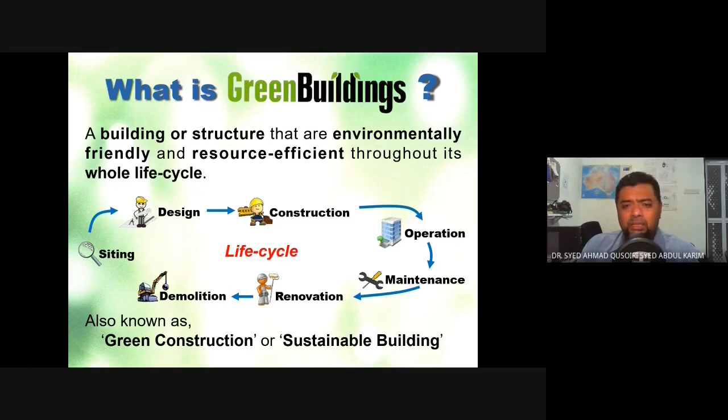The objective of green buildings is reducing the total effect of the built environment on human health and natural environment. As we all know, any developed areas, especially towns, cities, mega cities, consume a lot of resources from the environment, especially in terms of energy, materials, water, things like that. Compared to the suburbs, the city would require a tremendous amount of these resources due to the activities being done in the city area and the number of population in those areas.

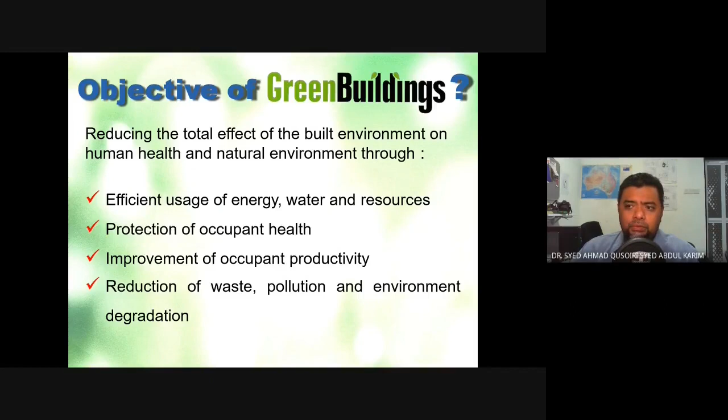So to ensure that these built areas try to sustain themselves as much as possible, it needs to be run in a manner that considers sustainability. One way of doing that is making the building more sustainable by the use of green buildings. Green buildings are able to efficiently use the resources - energy, water, and other resources. They can also protect the occupant's health while using that building, improve the occupant's productivity due to the special characteristics of the building, and also reduce the waste, pollution, and environment degradation due to the activities being done inside those buildings.

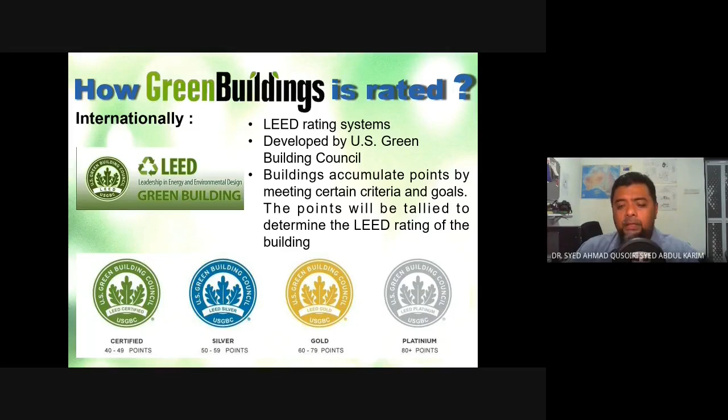So how are these green buildings being rated? In the US, they use LEED, the Leadership in Energy and Environmental Design. This is a rating developed by the US Green Building Council, used in America. Buildings accumulate points by meeting certain criteria and goals. The points will be tallied to determine the LEED rating of the building. Depending on the score or points that you get, you will receive either a full certification, or silver, gold, or platinum certification.

Criteria and goals of the LEED rating system - there are certain requirements to achieve this certification. Projects must earn points in these categories. Innovation - introduction of novel features and procedures of the building, whether during the design, the construction, and so on.

Indoor environmental quality - the use of natural light and efficient air conditioning. The building needs to use as much natural resources as possible to avoid using too much energy in providing artificial indoor environment. If the building is able to take advantage of natural lighting to lighten up the interior rooms, that will be extra points. Modern buildings these days don't rely as much on natural ventilation as in the old days, but even when using mechanical ventilation, they must use a system that is as efficient as possible.

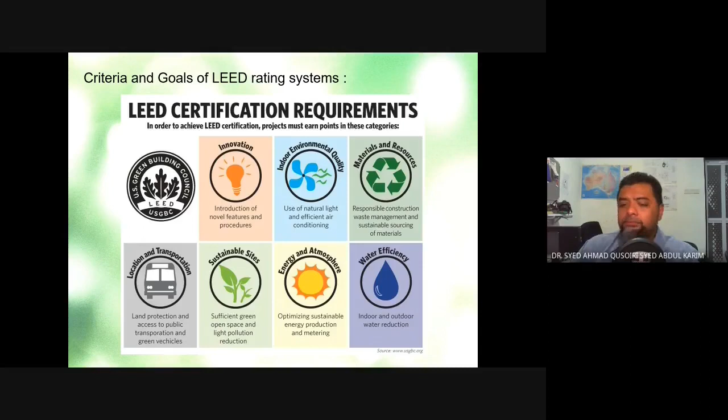In Malaysia, we also have our own rating system. We don't adopt the American type; we have our own, known as the GBI index, Green Building Index, GBI rating system. This is developed by Pertubuhan Akitek Malaysia (PAM) together with the Association of Consulting Engineers Malaysia. It is a comprehensive rating system for evaluating the environmental design and performance of a building, especially in terms of being sustainable, with points ranging from lowest to highest.

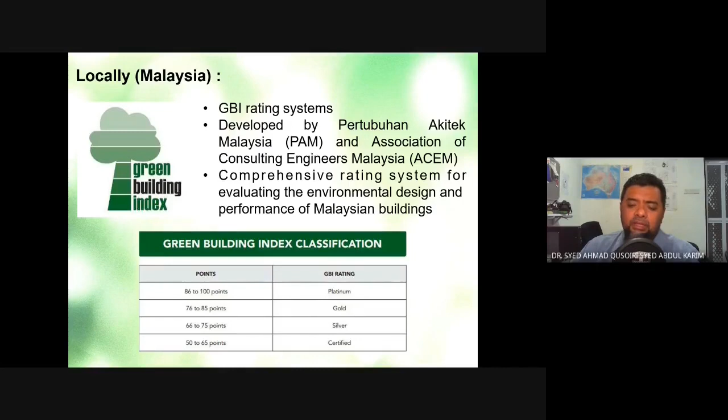The lowest rating is certified, meaning they have the basic certification of GBI. 66 to 75 points gets you the silver rating, higher is the gold rating, and the highest is the platinum rating.

Next is the criteria and goals of the GBI rating system. The building will be awarded based on 6 key criteria.

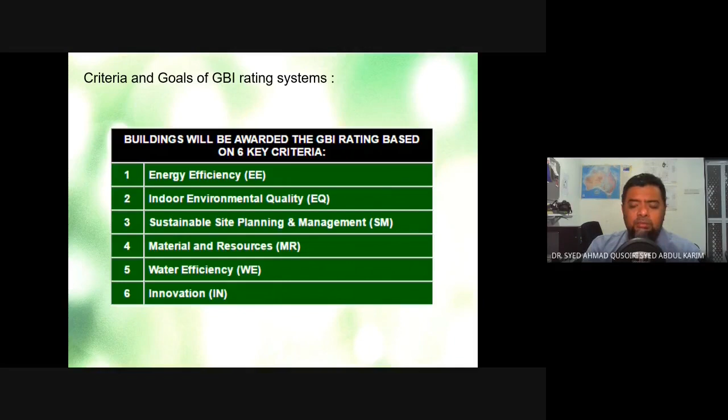Number 1 is energy efficiency of the building. Number 2, indoor environmental quality. Number 3, sustainable site planning and management, especially during the construction stage. Number 4, material and resources - how much reusable materials are used back into the project. Number 5, water efficiency in daily operation of the building. Number 6, innovations in improving the sustainability of the building.

What are the benefits of green buildings? There are tremendous benefits in developing green buildings. First of all, the reduction on environmental effect - green buildings have a smaller or slightly reduced effect on the environment compared to conventional buildings. So if we have a city full of these green buildings, that city will not impact the environment as much as cities with conventional buildings.

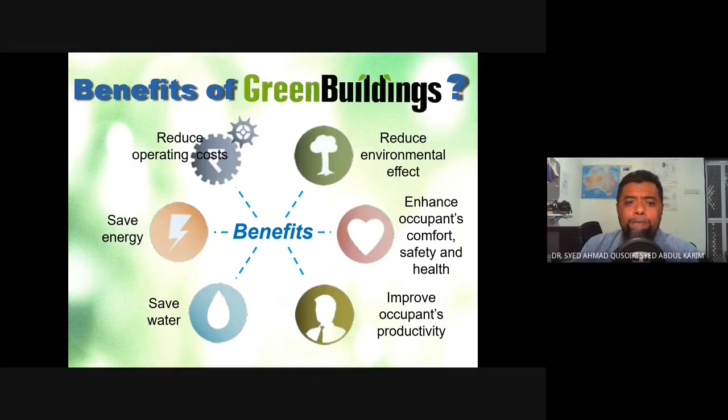So what are the challenges of green buildings? Just because there are a lot of benefits to developing green buildings doesn't mean everyone would want to adopt it as soon as possible. Obviously, there will be some challenges.

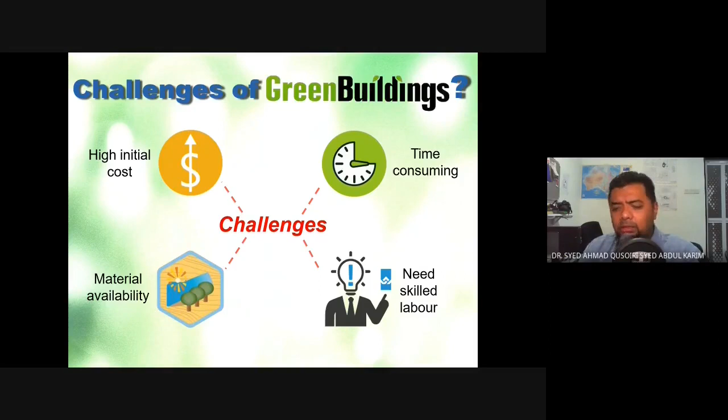So next, the elements of green buildings. There are 5 elements of green buildings listed here.

Obviously, energy efficiency. The building must be using energy that we tap from the grid, but also it needs to use energy acquired through sustainable means, such as solar, wind, and such. Next is water efficiency.

The building needs to be able to use water in a safe manner, meaning there would be less wastage of water, and it is also able to acquire water from other types of sources.

Indoor environmental quality enhancement. They need to improve the indoor environment, especially with the use of green technology and green materials, to improve the comfort and productivity of people inside those buildings.

Next is waste management. The waste of a green building, even though it can be reduced, is managed in a sustainable way. And of course, the design efficiency of the building is important to ensure that the building does not need to use as many resources as conventional buildings, especially in terms of lighting, wind, and water.

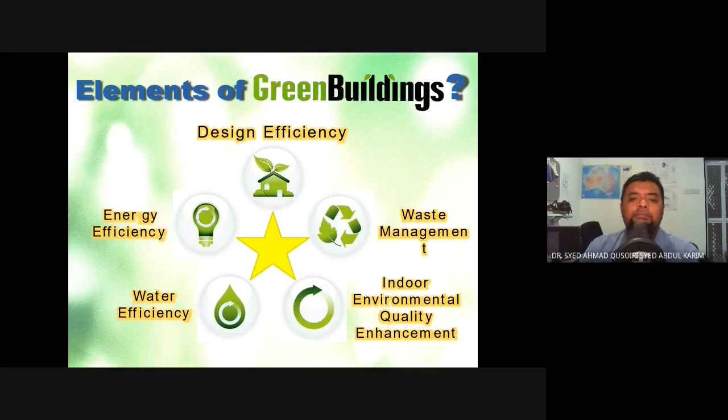So next we move on to design efficiency. Sustainable design is a responsible, forward-thinking method for building the best structure possible in the most efficient way. So in terms of the design efficiency aspect, the things that need to be considered include the windows, ventilation, walls, and roof.

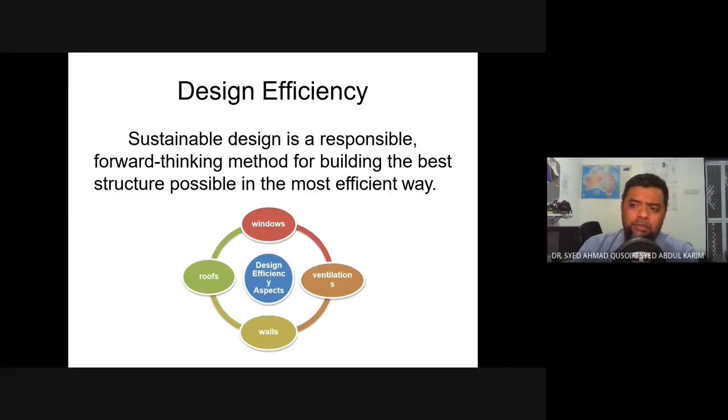These elements will greatly affect the efficiency of a particular building. In terms of windows, it must have a smart design and innovation. It can provide lighting, cooling, and heating for a comfortable building environment, so the window must be designed in a way to execute those tasks.

Appropriate sizing and solar orientation can provide useful natural light and heat flow for the building, and can also optimize energy use. This is something that has not been taken into consideration a lot, meaning using the right size of window and placing it at the right spot for that particular building.

We can see that in massively produced buildings, the location of the windows is all the same, whereas the geographical position of the building is not. So for a particular green building, the size, location, and orientation of the windows and doors are very crucial, so that we can optimize the use of energy, especially in Malaysia, in terms of cooling the building itself.

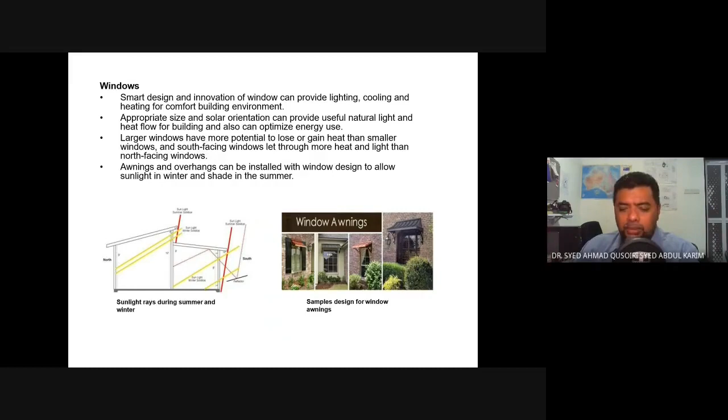Awnings and overhangs can be installed with window design to allow sunlight in winter and shade in summer. This is especially true for overseas buildings, but it also still applies in buildings in Malaysia, where awnings and overhangs can stop sunlight from directly impacting the windows, which can generate a lot of heat. By having these features, we can reduce the temperature inside the building through sunlight radiation.

Next is on ventilation. For sustainable buildings to provide efficient energy use, good ventilation design should take part. Especially for large sustainable buildings, they have to really consider the use of natural ventilation. Good design will take advantage of natural outside fresh airflow to provide a comfortable environment in the buildings.

This is because natural ventilation, fresh airflow that occurs naturally, is free and doesn't require any resources. So it's not only free, but it's also environmentally friendly. The architect needs to design the building to take maximum advantage of this natural airflow.

Otherwise, the building's surrounding should also be considered, since there's a risk of smoke and dust entering the building via ventilation. So in terms of natural airflow, the architect not only needs to consider the design of the building but also the building's surrounding environment.

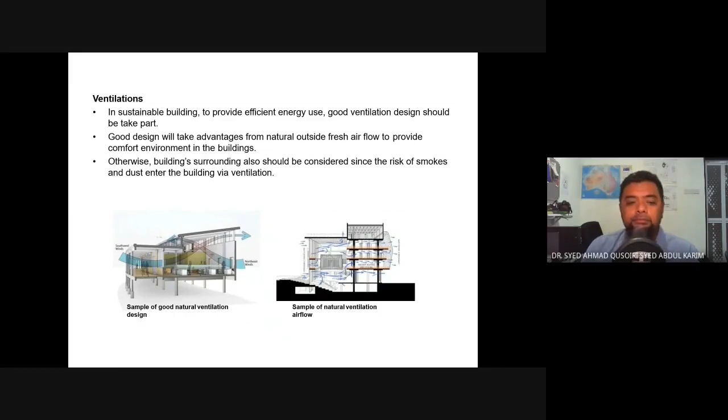Next, in terms of walls, the wall material used is important since heat transfer can be optimized by suitable material selection. We can control the rate of heat transfer that is impacting the wall.

The use of thermal mass and insulation for the walls will reduce the amount of energy used to provide a comfortable environment. Meaning that if we prepare the wall in such a manner that it reduces thermal absorption, we can reduce the energy needed to counter this, or if we can control the thermal mass of the wall, we can also reduce the energy needed to reduce the heat present at the wall.

So building walls constructed by waste materials, such as bottles, or walls constructed with plants, should be implemented by designers since both would be able to give benefits to the people in the building. By using these new novel technologies, we are able to reduce the thermal impact of the sun on the wall.

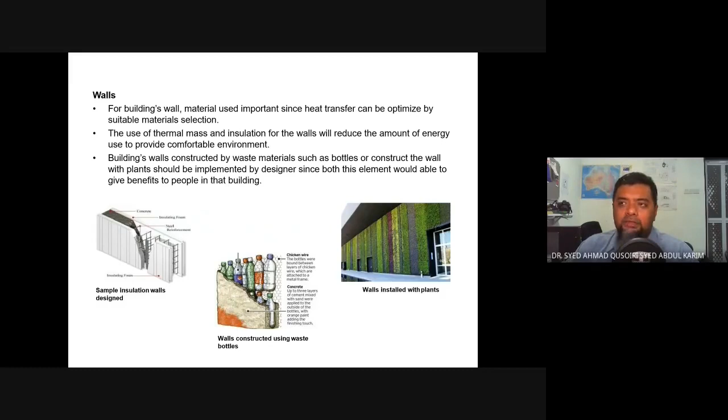Next is in terms of roof. In sustainable buildings, the roof is one of the aspects that needs attention since there's plenty of free space. So usually on the roof they will put solar panels to provide green energy into the building, saving electricity costs and also storing energy for emergency use.

So for a green building, it must reduce its need towards conventional energy from the grid. It must also be able to generate its own electricity. Well, not all of it, but a certain percentage of it.

The designer can also implement a rainwater harvest system on the roof, since this element is able to minimize water capacity needs. Same with solar, by having a rainwater harvest system we are able to reduce the building's dependency on water that comes in from the main pipes.

So we can use this rainwater harvest system for, let's say, non-consumption use like watering the gardens, washing the cars, things like that.

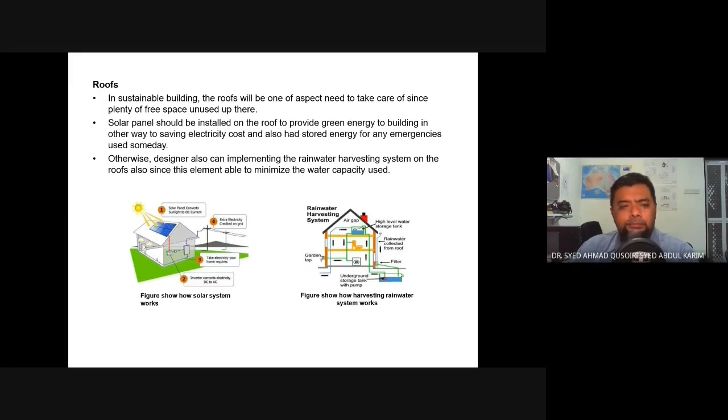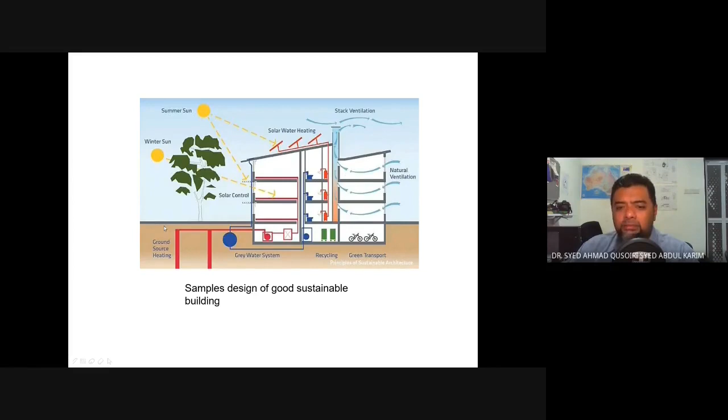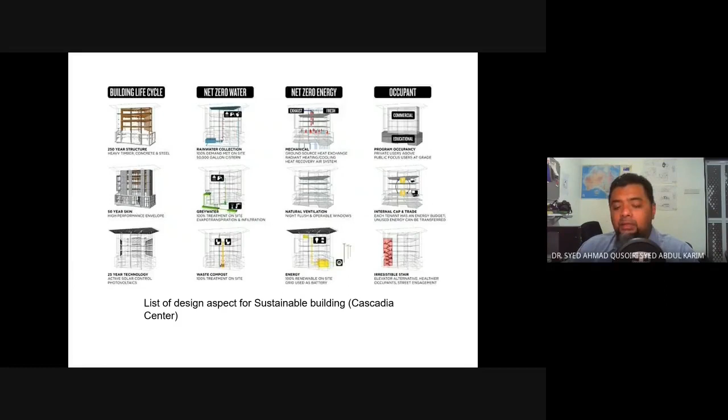In terms of occupant program occupancy, we differentiate between private and public areas. There's internal cap and trade, so everybody has a certain limit of energy they can use in a month, let's say, and then irresistible stairs, promoting the use of stairs rather than elevators.

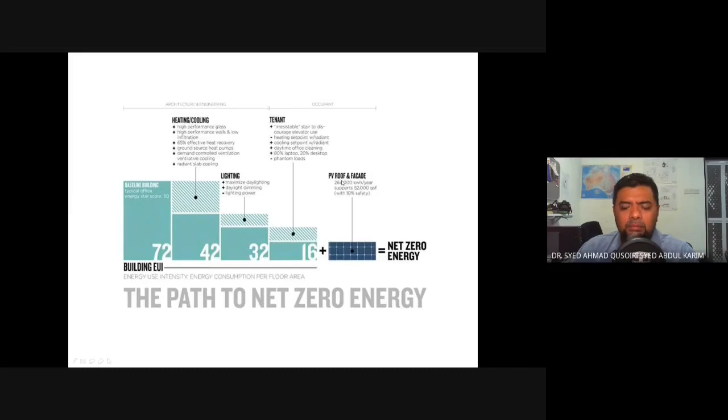So these are some plans of net zero energy buildings. We have baseline building, heating and cooling aspects, lighting aspects in terms of tenants, and solar roof and facade.

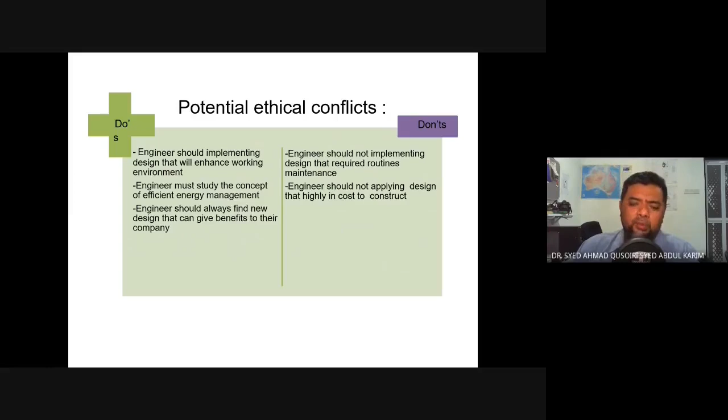The don'ts: engineers should not implement designs that require routine maintenance - the technology must not require too much maintenance. The engineer should not apply designs that are highly costly to construct, so the technology must be somewhat affordable for the client.